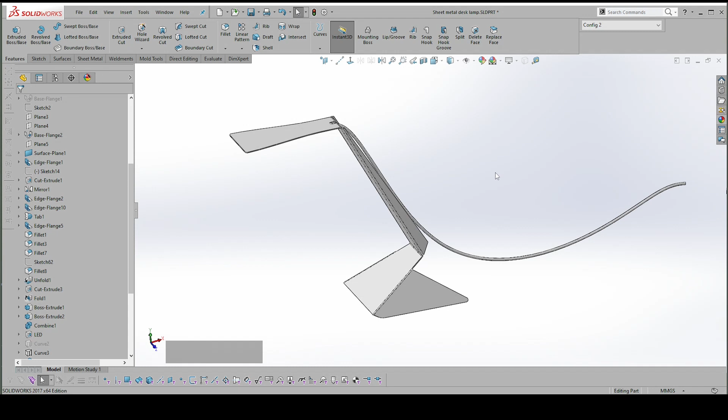Today I'm going to show you how to create this wire together with this representation of a strip of LEDs. I'm not sure how accurate this is, but this is just a demonstration of how to do it. And I'm going to do it within a single part.

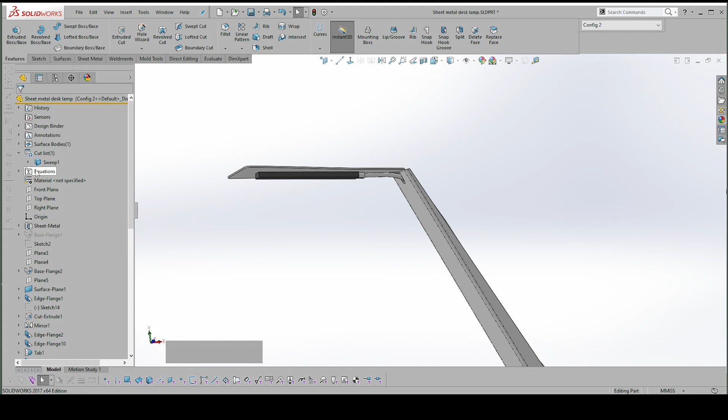This is what's called a multi-body part. You're kind of familiar with it already, but I've got a cut list here of one, that's because I haven't disconnected these. It's called a cut list in this case because I'm in the sheet metal environment, and that has cut lists instead of bodies. So this is what I've got currently set up.

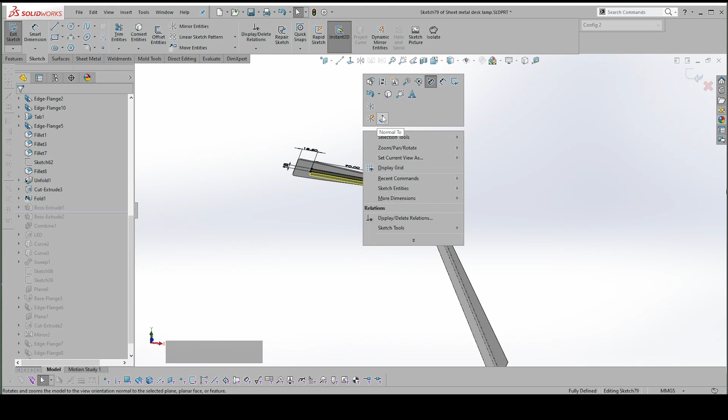I'm going to roll back to that point. And for the body, I will just use an existing sketch. So let's edit that sketch. What I've done is I've drawn on this surface. You can see it's just a rectangle 90 by 9 with a locating dimension of 18.5.

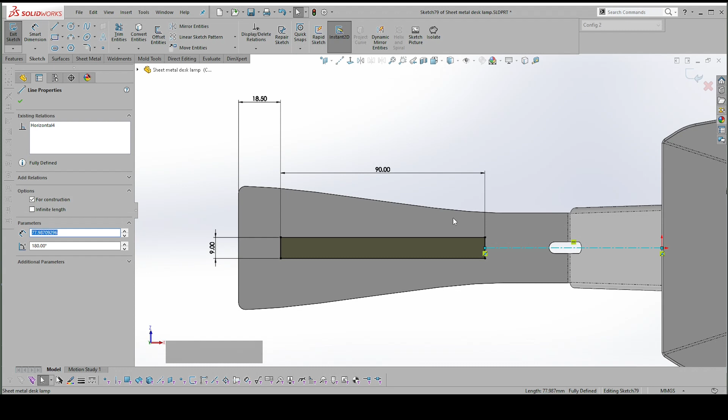And then because I've created everything around my planes, this is centrally located. So I can just locate using this construction line, and I can locate the rest of this block. So I exit this and then I extrude it.

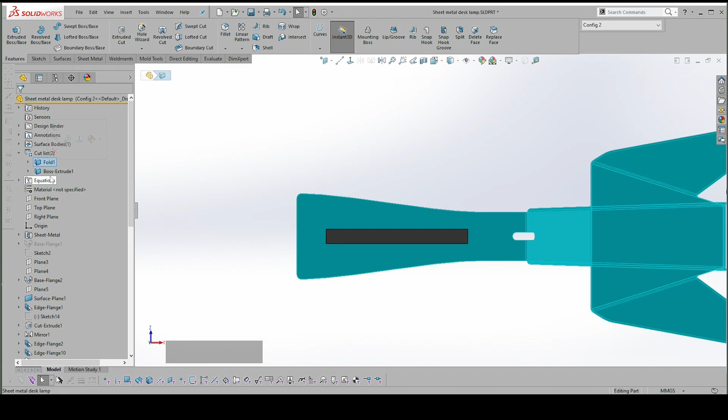When you extrude, to keep this into separate bodies, make sure that you do not select the merge result button. So I've unclicked merge result and I should now have 2 bodies. There we go - there's a fold and there's boss extrude. So 2 separate bodies.

But because that's located using that sketch, it's in place already - it can't move about. And then the little flange or grommet that connects the wire, the way I've done that is I've also just created a sketch on that plane.

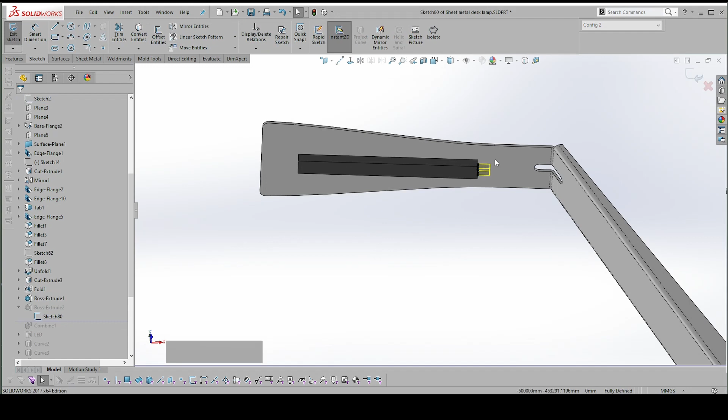So let's go to that plane and have a look. I've drawn a center line that goes through the 2 parts. If you go to this view, yeah, you can see there's that block. And then I've created a circle and just chopped it off with 2 lines.

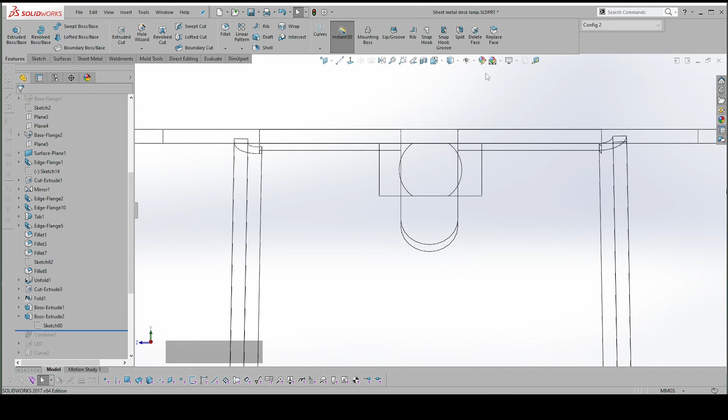From there I've extruded, but now you have to be careful that you do not have the merge result button on, because if you do, it'll actually merge everything together. Let me show you - if I go back to this set of parts, there's just one. So to get around that, let's go back in here and untick the merge result button.

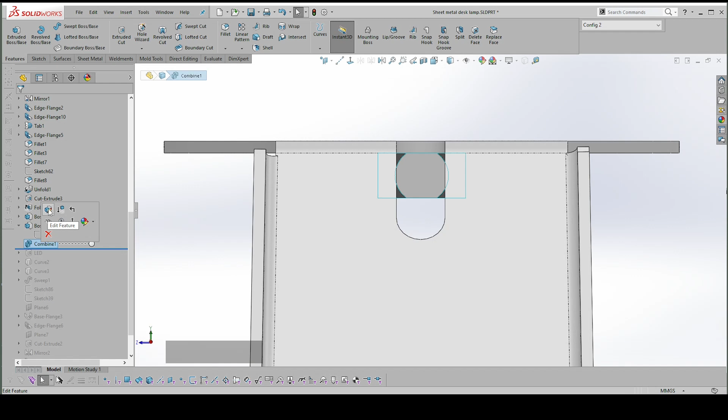To get around that, you need to combine. So that's the combine feature, which you're already familiar with. To edit that feature, I've just added the 2 together and I've selected that body and that body. So that's the light and the flange.

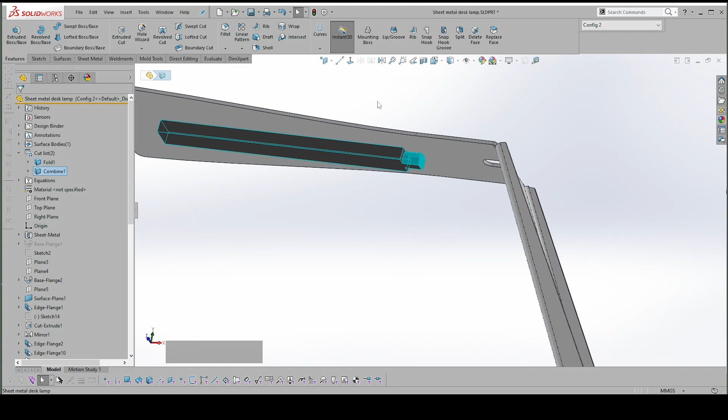And now I have 2 bodies. Here we go - I've got the fold, which is my actual light, and then the combine, which is those 2 there. And then I think I've done one other thing - yes, I would have created a hole.

So that there, I've called it LED just so that it's easier to see in my bodies what it's called. But it's just a cut extrude, and I've just cut a hole 3.5 millimeters down to that surface there. So that's fairly simple.

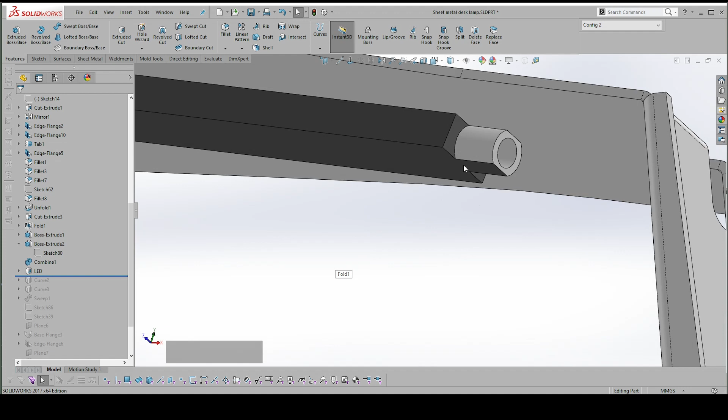That shouldn't be difficult, but this way of working called multi-body parts is quite common around the world, especially if you want to hand your file over to another person in another part of the world to carry on working while you sleep. This is an easier way to do it than using assemblies because there's only one file.

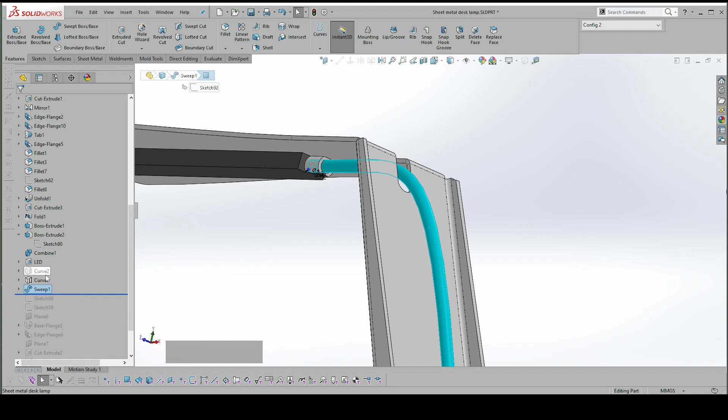So let's have a look at the generation of the wire, because that's the interesting bit. At the moment, I've got this sweep - the sweep command is what we're going to use. And then I've got a 3D curve, which is not shown. So I'm going to create that curve from the beginning just to show you how it's done.

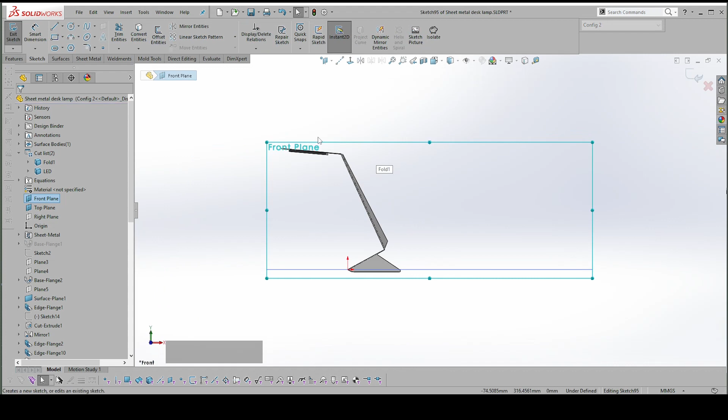In order to do that, the best way is to select the front plane and the top plane to sketch on. I'm just showing them so it's easier to find. Let's put a sketch on the front plane, and then zoom in on this area from the flange onwards.

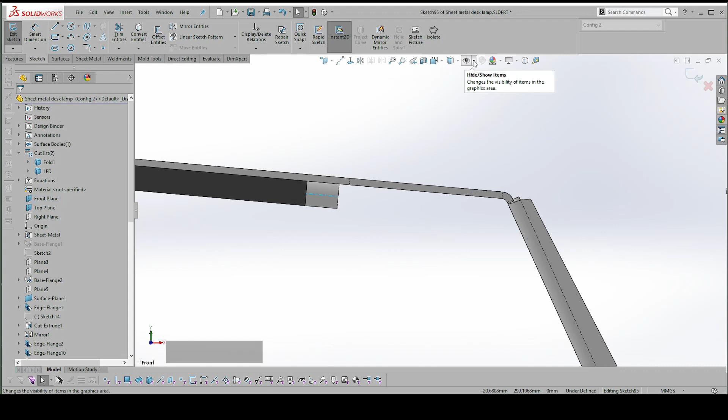I could, if I wanted to, go to this hide show button and show the views temporary axes. I could click on that and it would give me all of the temporary axes to use. I've discovered in practicing this that's perhaps not the best way to do it, but now you are aware that temporary axes exist everywhere.

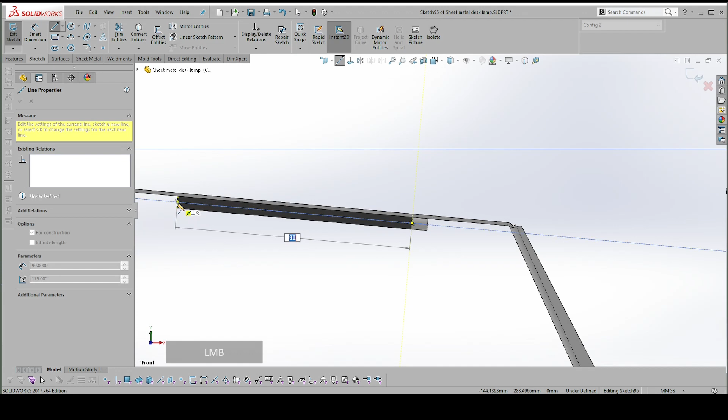So what I'm going to do instead is want a construction line from which I can create a curve, but I want it to be tangent to that construction line. I'm going to make that construction line stretch across this body so that it's fixed in place, and it can't move, and I can't select the wrong end of it for my curve.

And then for the curve, I'm going to select a style spline because it's easier to manipulate. I'm going to select this point, and then I'm not sure why that didn't work - let's try it again.

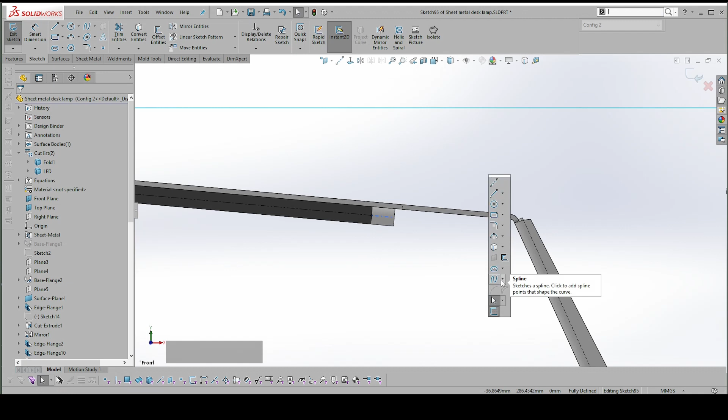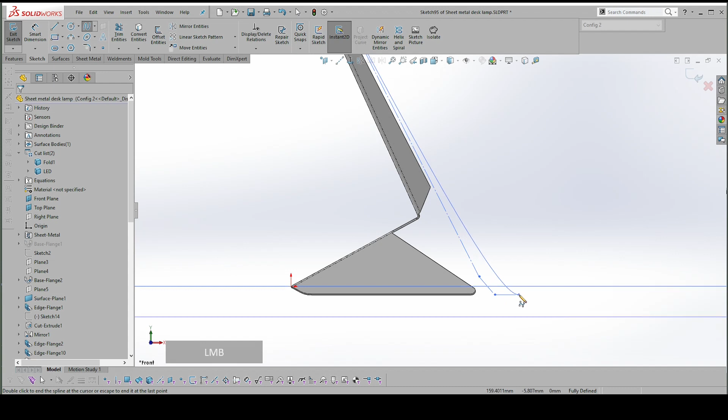So here you click, let go, drag out to where you want to be, click. Because we're going through a fairly tight corner here, we need a few of these, and then we don't need much in between. At the bottom here we need maybe another tightish corner, and then maybe one out here.

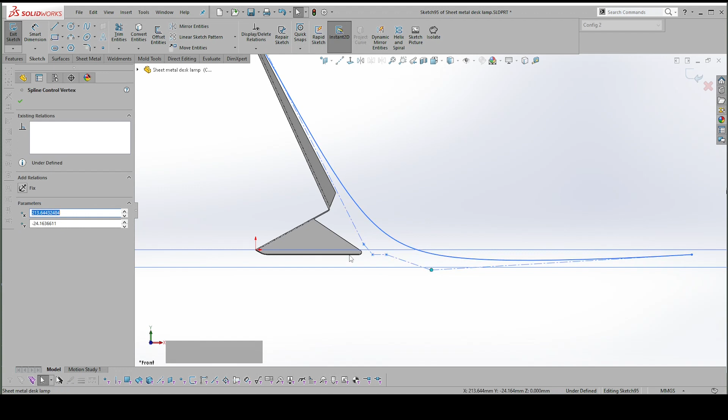So the two things I want to do with this: I want to be able to establish what length it is in total, but I'll do that in a moment. The other thing is I want to be able to locate this last style spline handle, that one there. I want to be able to locate it just above ground level so that it looks like the wire is on the ground.

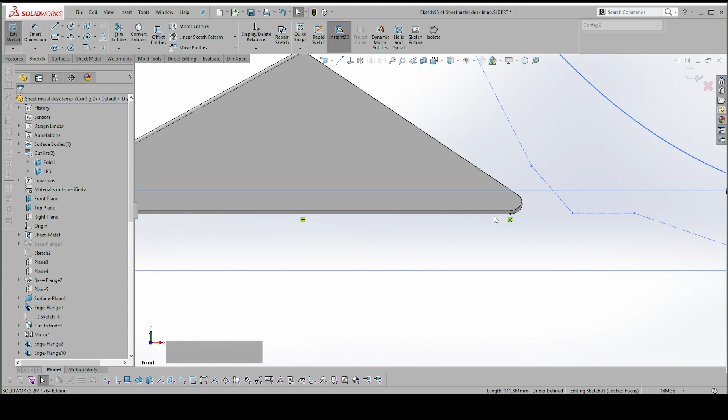So I need some sort of line to locate it with, and it must be on the ground level. So this is where my ground level would be. I'm putting in another fixed line, there it is. And then I'm going to select that one and this line, and make them parallel, because I want this to be a little bit above the ground level.

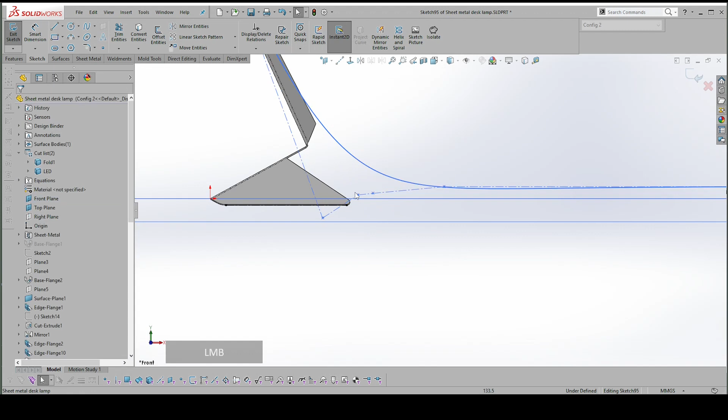So let's put in a dimension from there to here. Nope, pull this above again. So just pull these out of the way. You can manipulate as much as you want. Probably need a few more, one or two more control points.

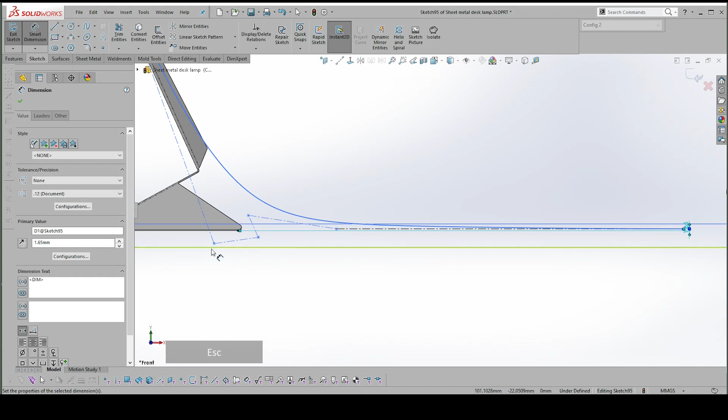Let's try that again. So I'm going to go from that line to this point. There we go. And I want that to be 1.65, so just a little bit above the ground, because my wire is going to be a nice thin wire.

Right, so just to check that this 3D line is not going to interfere too much, so I don't have to manipulate it later, let's just pull this out. Looks about right. Maybe pull this one down a bit.

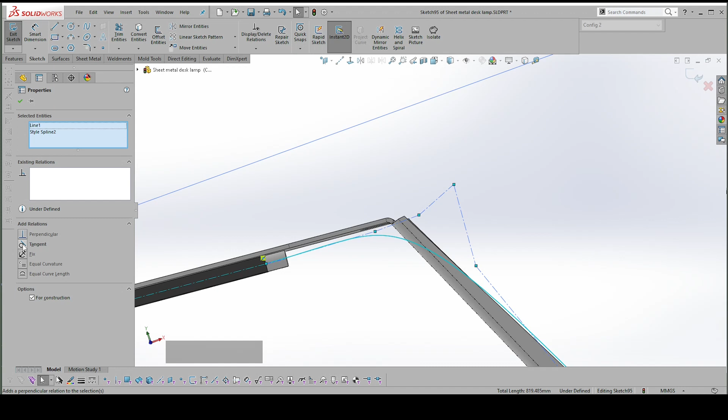Okay, and then there are two more things that I need to do. One is to get these two, that line that I constructed, and that other line to be, I think, tangent. Let's see, will that do it? Yes, tangent's fine.

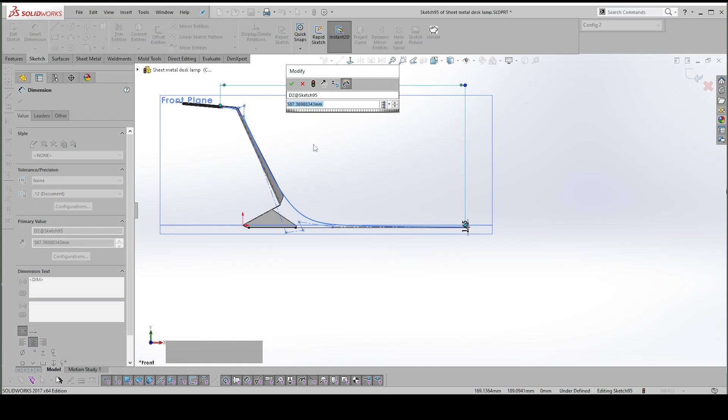And then lastly, just because I need another curve, I need to know what the length, not of the line, but just the length, an overall length like that is. So let's make that 580, and then we can remember that figure and use it again.

Okay, so move that out of the way. Right, all good. I'm not going to fully define it. You can, in this case, but you don't need to for once.

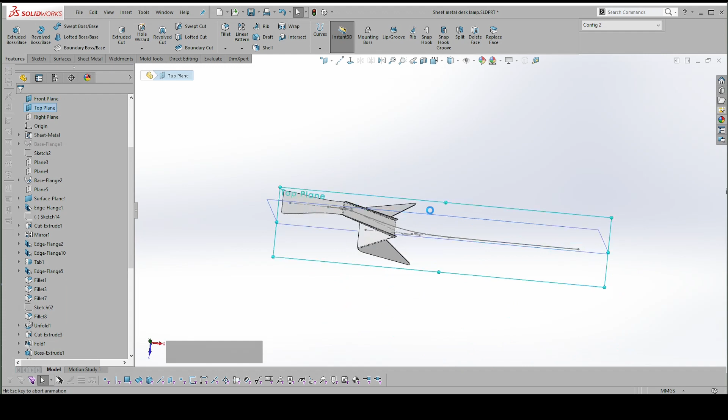And then the top plane is going to be our second sketch. And so here I can see that line there, yeah, that's my center line. I could convert it - I think I'm going to, and just make sure it is a construction line, and then use the style spline again.

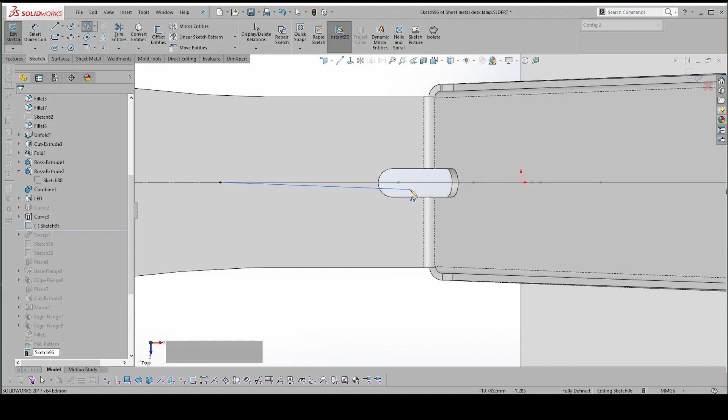So this time, let's zoom in a bit, just make it wander a little bit so that it looks like the line isn't some sort of rigid line. And then obviously at the end here I can make it do whatever I want to do.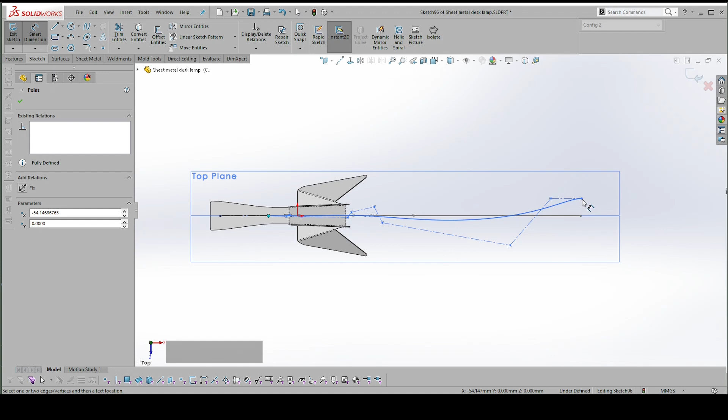So in around about there, and then here's where I'm going to use that 580. So go from this point, add a dimension into that point, and lock it in at 580. And that's good. Although we do want this line to be collinear with that line, right?

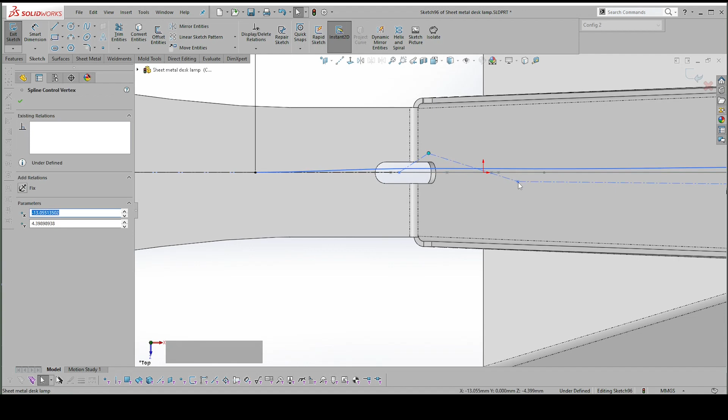So you can pull this out, play with it if you want to. And that's good enough. Now I've got the two lines.

Now we're going to project curves. So we're going to take those two lines and make them intersect with one another, project onto one another in what's called a - what is it called now? It's a project curve, but it is sketch on sketch.

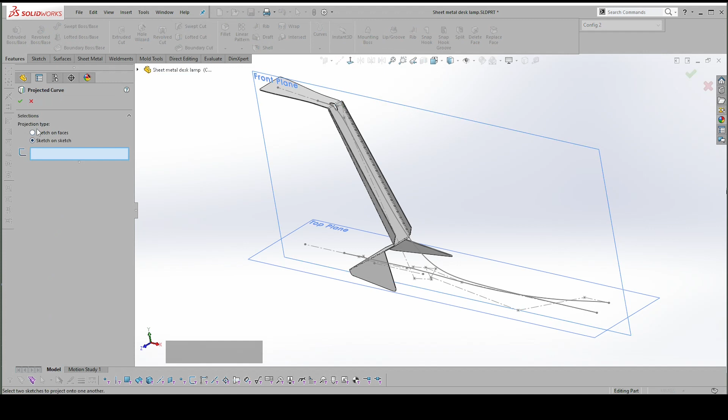Okay, so in your project curve, you've got sketch on faces or sketch on sketch. Make sure it's sketch on sketch. We just select the two lines, 1 and 2, and say yes. And then when you exit it, you've got this very neat 3D line.

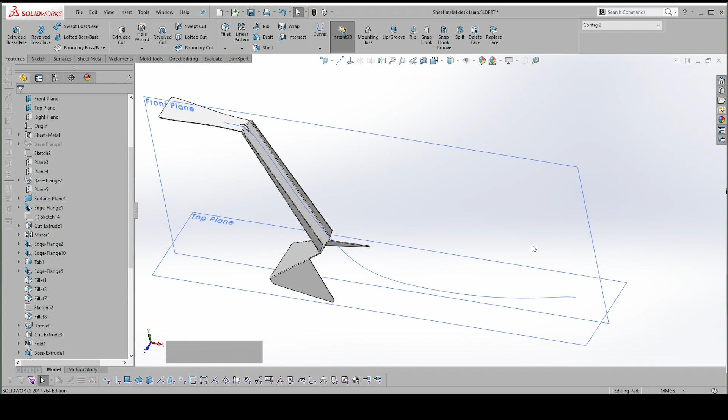And then the last thing I need is some sort of profile so that I can get a swept boss. I can either put a construction plane on the end - that might be a good idea.

So I can either do it this way: I select the line and then I just select the end point of that line. And that plane will be normal to, perpendicular to the end of that line. So that's one way.

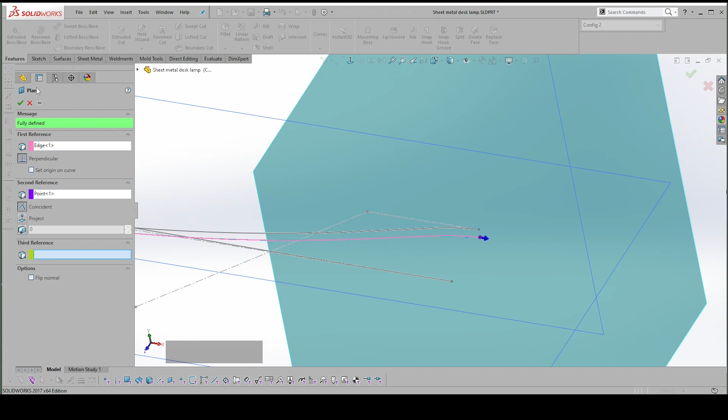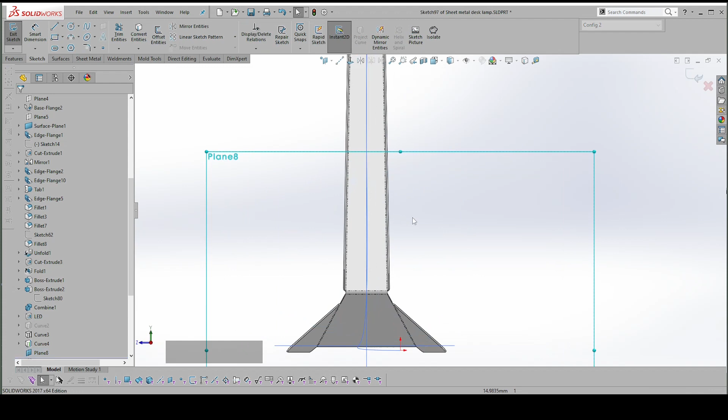And then obviously I can then sketch on this plane and then do the sweep. The other way is to select the face from which we started, which is this one, and put a sketch on there. So I'm going to go back to this plane just to show you how it works. You have to look carefully, but you'd see in the background that the full item doesn't sit exactly end on.

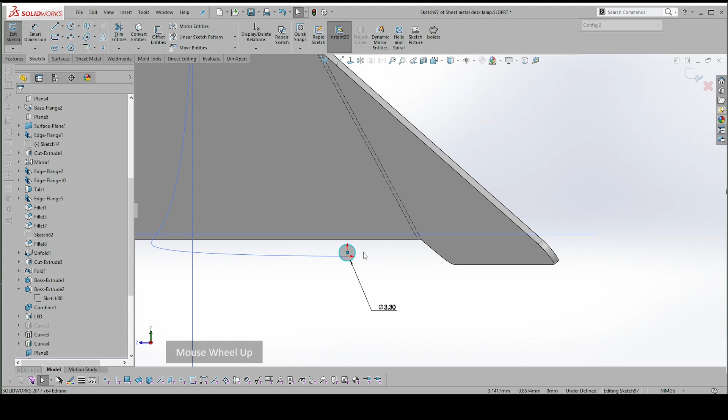So as long as you select this origin point, you drag your thing out. So I'm going to make it 3.3, drag your circle out 3.3. It should be good. If it isn't connected, make sure it does connect. So make those two line up, which I might try and - there we go.

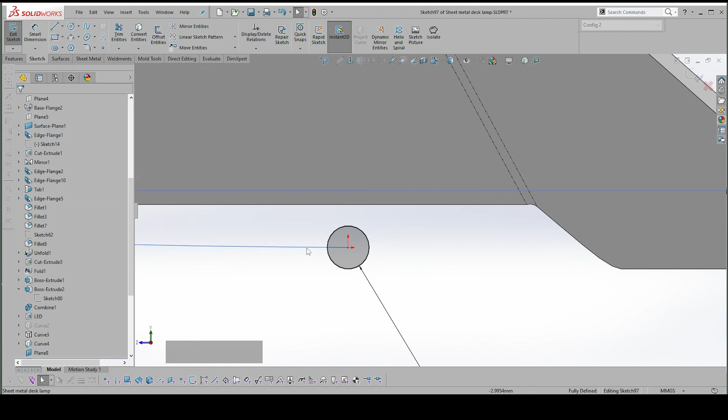So if you're having difficulty getting it to connect, just select the line and then the point, and then say make pierce. That'll make sure that this line here pierces this plane, and the center is located at that pierce point.

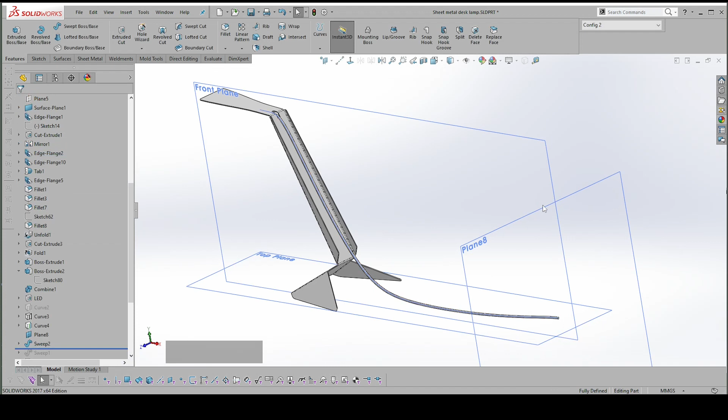So if I exit this sketch, I can now use the swept boss base or swept boss. I've got that circle as my sketch profile, and for my path I can choose that item there, and there we go, we have a wire. So let's just hide these, and then you can hide the curve.

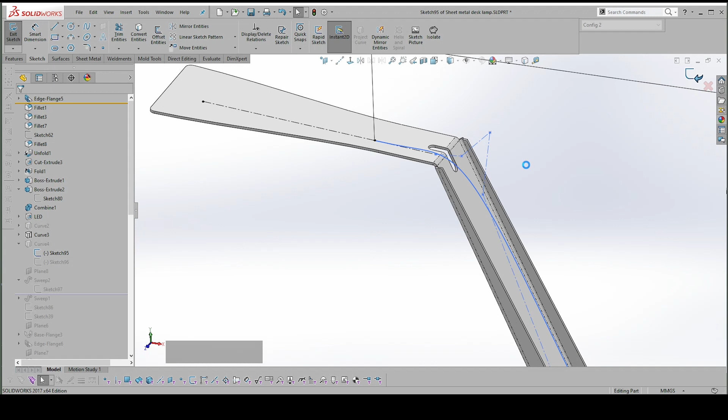Right, and if you need to adjust it, let's say this is a little bit close, just go back into your sweep command - your two curves, oh no, it's this curve command, sorry. So you just double click on one of these curves and just adjust this a little bit, and it should update immediately. Has it done it? Yes, it has. So that's how you do it.